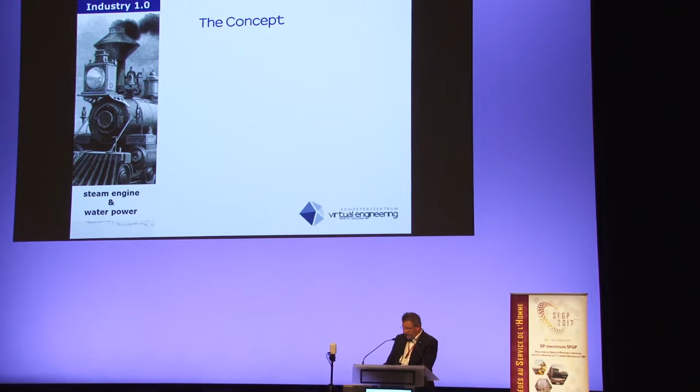So, history continues, a little history. Why do we call it Industry 4.0? Of course, the first industrial revolution came with the steam engine and water power. With this new technology, we increased mobility of people and of goods, and it led to the speed of production itself.

The second industrial revolution was by reorganizing the work. The production was done now on assembly lines, and the introduction of electricity was supporting this fact and also brought wealth to the people. So the second big change in production in the life of people.

The third level of industry was only limited now by the physical boundary conditions of the equipment. We developed software, we developed embedded systems, and they were helping to create or to use smart products, smart devices, but the limit was that they were not connected yet among each other.

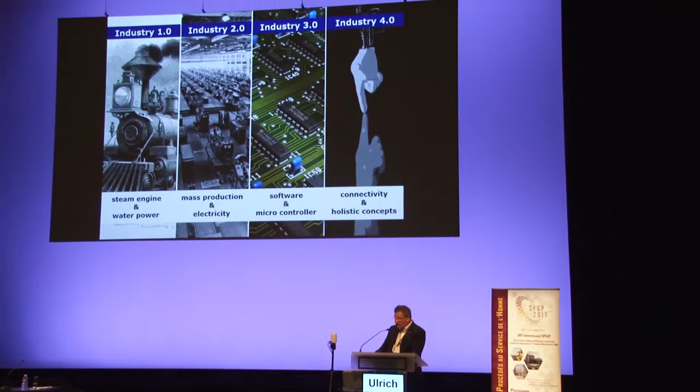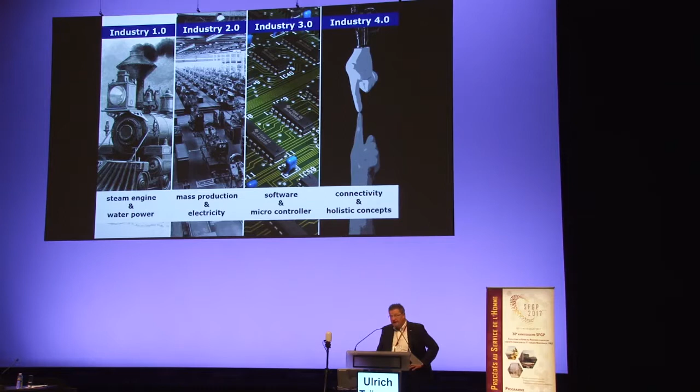And this now leads to the fourth concept, the Industry 4.0. Here, all smart devices - I'm using some examples later on - regardless of the data exchange protocol, one follows now not an individual device, but really tries to connect everything with each other. So the idea behind Industry 4.0, at least this is my perception, means no boundaries between the machines and the software, no breaks. That means there is really communication possible among all the devices.

Also important, and this changed the view for process control people, there is not really a hierarchy anymore in the organization of devices. You can simply say everything is totally connected. And in the words of our Chancellor Merkel, this is what we call Industry 4.0.

I have to say at this point that the term Industry 4.0 was never a research project, was never an official project of the federal government. It was a concept paper written by the federal government and later established in the group called the Group of Industry 4.0. But this group, of course, consists logically of software producers, and this is why the interpretation of this terminology has to be seen under this aspect.

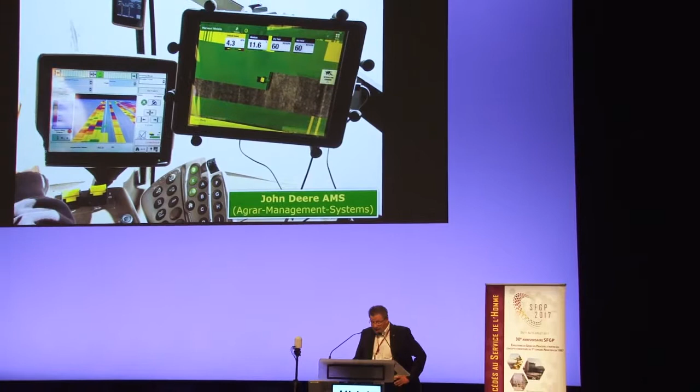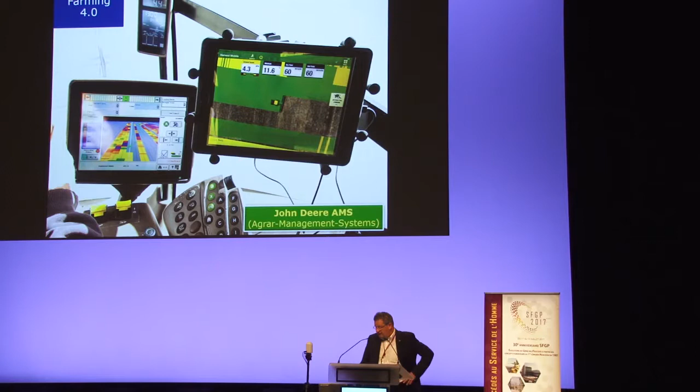And this I want to show with my next slides. I call this Farming 4.0. What's seen here on the picture? The farmer, of course, it's a John Deere, this is my sponsor, shows you a picture of the interior of a cabin of a farmer. And the modern farmer uses data on the condition of crop, of the soil, be this humidity, be this the growth state, be this any attacks by weed or any attacks by bugs that are not wanted. At the same time, the modern farmer is connected to databases where he or she gets instructions of what to do with the field that has to be treated.

And on the left picture, you really see that these are compartments, something a human being cannot really tackle with. So you need modern software, you need the connection to databases, you might also need the connection to the chemical products that are used to accelerate growth or to do the bug control or the weed control. And so the farmer is very, very modern already. And my colleagues from John Deere always said, we do Farming 4.0 already, but we don't do Industry 4.0 yet.

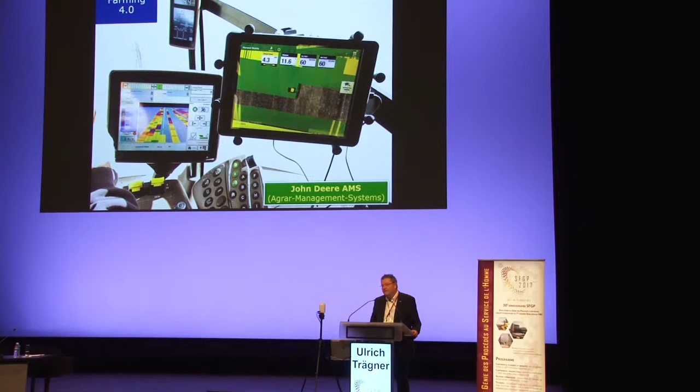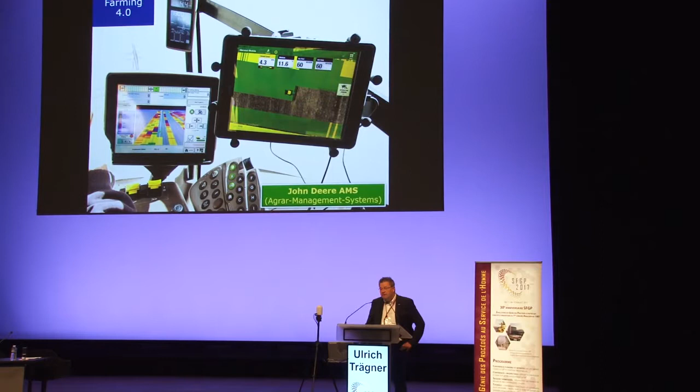This is a surprise to me, but maybe I can show this later again. What I also like on this picture is this device. Most of you might recognize it. It's an iPad. And this is also typical for Industry 4.0. Industry 4.0 connects everything with everything. So if you want innovation to seep into everyday life, you do this by using devices that are familiar to everybody. This iPad is nothing new for the farmer. He is using it for private reasons as well as commercial reasons.

And this is, I will say, also really characteristic when you say you connect everything with everything. So a product is not leaving the factory without being connected to its customer. This is very important.

Now, John Deere says, oh, we are not doing Industry 4.0 yet, but in my understanding, yes, they do this in cooperation with our university. We run a 5-sided cave, and a 5-sided cave you have to imagine as being a cube of 3 times 3 times 3 meters, and people go in there and they are inside an image, and this image is 3-dimensional, and this 3-dimensional picture allows you to do certain jobs.

In the past, John Deere was, when they developed their product, mostly concentrated or focused on the cabin, where the farmer is doing his operation and the control of the engine. In the past, John Deere was building 6 prototypes. The 6 prototypes were awfully expensive.

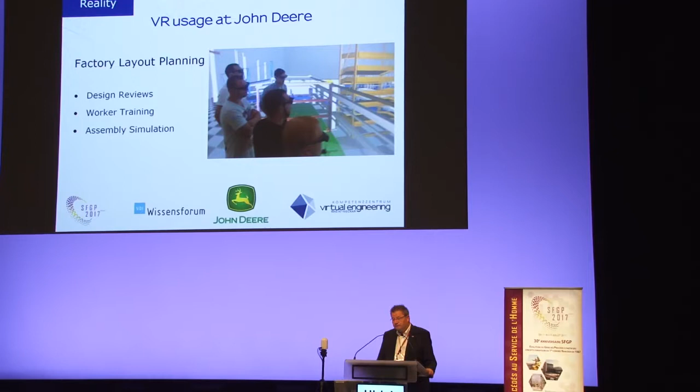Even there, and this is maybe because they say they are not that far yet, the factory planning is not really an integral part of the digital system yet at John Deere, but we have already started doing so. So product, customers, and production is what is connected with the idea of Industry 4.0.

Well, then, after learning, being a chemical engineer and of course also the director of this corporation, I was asking myself, how could this be that the car industry, the commercial vehicles, are further advanced than we chemical engineers, than we process engineers? But then I remember that I was invited for several years now to the Digital Plant Congress in Würzburg, and they had actually the same idea.

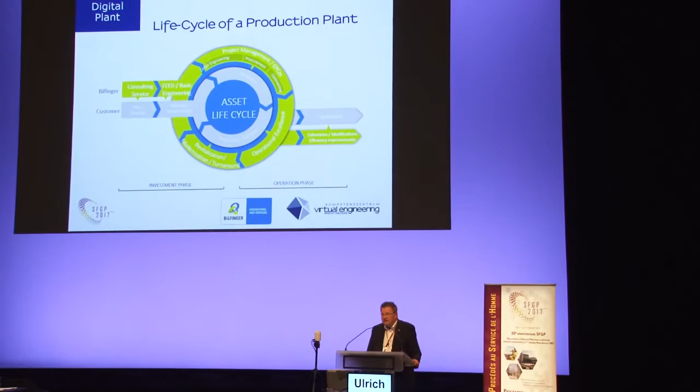To introduce connectivity, to introduce the holistic view into process engineering. Here I learned, and I also found partners in Bilfinger, that being a chemical engineer, a process engineer, I should not look on individual things exclusively. I need to connect exactly with John Deere as well.

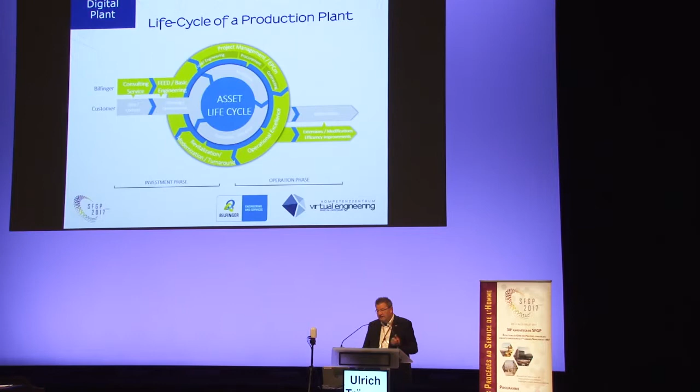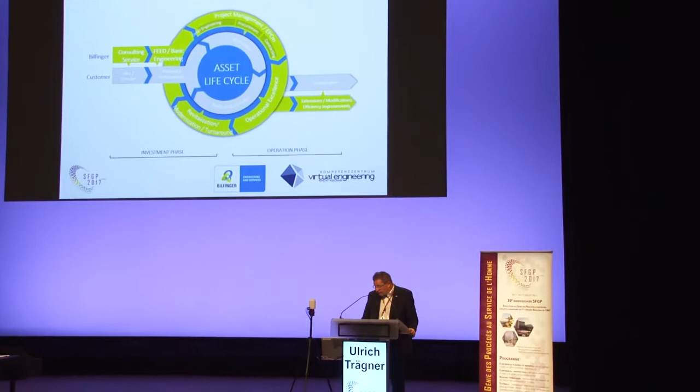So there is a creation phase for your products. There is a creative phase for the design of a plant. There is a pre-design phase for your plant. There is a pre-design thinking, a pre-design, a preview of your product, of your planning.

And then don't forget, when we build products, and the products can be, in our case, either a chemical plant or it can also be the chemical product, our products live much longer than a tractor. A production plant is living sometimes up to 40, 50 years. In BASF we had, I think, factories that run 100 years now and are still in operation.

During this life cycle, you need to redo, you need to review things, you need to do smart maintenance and revamping. These are all keywords you learn when you deal, or when you try to consider, the chemical production in terms of process life cycle or product life cycle.

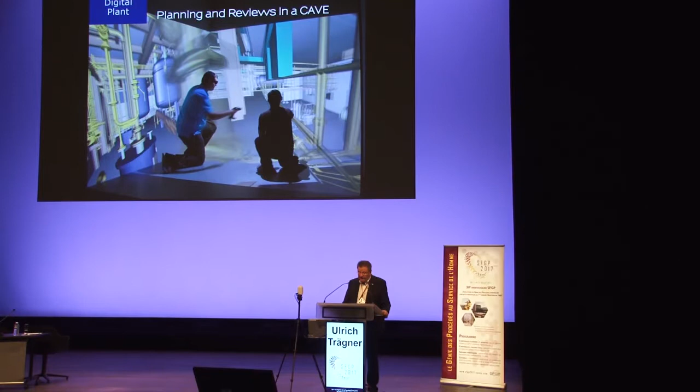So with time, we have more and more demand also from the chemical industry to use our cave, which is nothing else than the visualization of digital data. We use the cave with our customers, or with people who do planning, for plan reviews.

I learned that the review process in this business is not that simple and not that trivial, and it's not that homogeneous as with cars or commercial vehicles. We do layout planning, exactly like John Deere does with their plant. We do safety reviews. Actually, one can do with digital models, if available, the whole HSE, meaning Health, Safety and Environment Management Program.

And you can do this at an extremely early stage, meaning when you do the planning with the proper digital system and with the help of visualization, you can tackle and speed up your planning, and you can tackle complexity which you could not handle before. But you need a digital model, at least a digital volume model.

Think also of the situation where you design a GMP plant, good manufacturing practice, where you are not allowed to enter because you would spoil production. You could do reviews in a virtual space, and this is a possibility you did not have before.

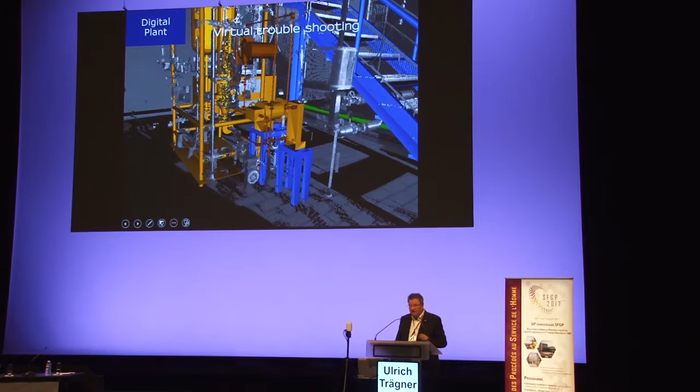This was the planning stage before we got this plant built, this distillation column built. Actually, this distillation column and the location of this pump was done exactly according to the plan. And this down here is the image of a three-dimensional laser scan. And then you see the location is up here for the planning stage, and this pump in reality is sitting down here.

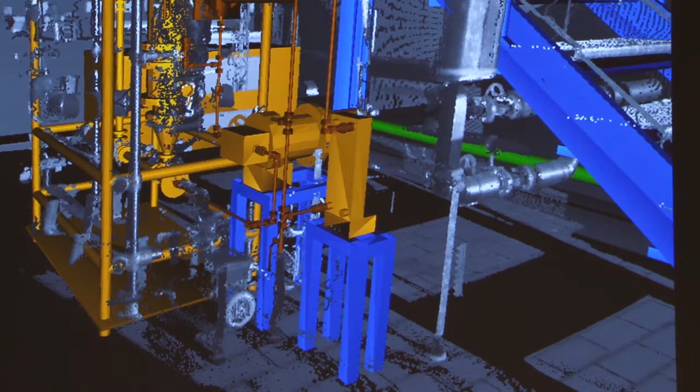Interesting, if we would have had this three-dimensional tool when we designed the column, the distillation column, that was 12 years ago or even longer, we might have discovered that you cannot locate sump pumps that have boiling liquids coming into a pump.

You cannot locate this directly on the same level as your reboiler. And I'm teaching this to my students, that you need to have a certain net pressure before the pump so that you don't have cavitation in the pump. And we had to learn it in operation after the third pump was gone and destroyed.

We said, okay, this is a mistake in the design. We have to put the pump down at least to have a certain amount of pressure on the suction side in order not to run into the danger of cavitation.

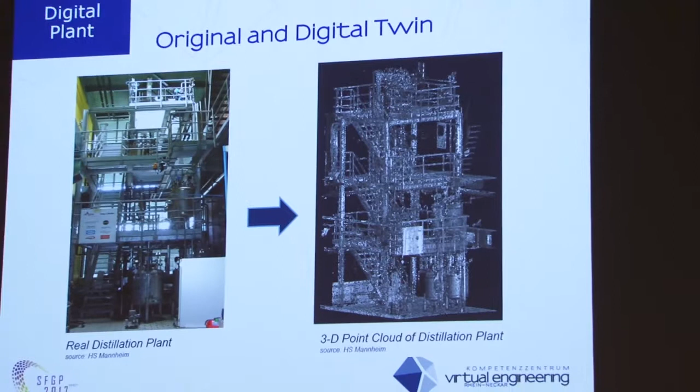Some people think, okay, if you take a three-dimensional picture of a real plant, you already digitalized your plant. This is a digital twin. Actually, this is just a small piece of a digital twin. The digital twin is much more.

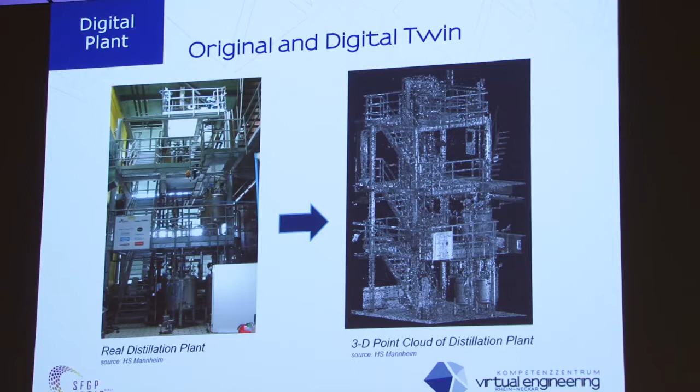It is the program itself, it is the model itself, it is the PLT, the digital computation system, it is also the 3D laser scan, which can be used to control and do a documentation of reviews and revamps. So this is a useful tool to do so, but later on, when you would have a whole digital plant, you could do virtual startup, virtual training, safety training, and virtual field trips, as I mentioned, with GMP production.

Well, we had the changing things, the digitalization in the process industries, and I'm educating young engineers. What do I have to teach them in order they are fit for future plants, as you say, the production site of the future? So I call this EDU 4.0, and because it's one of my courses, I can talk about it in more detail.

My course is called Plant Design or Plant Planning, and of course the specialist will immediately recognize everything. You need the process development step, you need the detail engineering, you need the basic engineering, you need project management, and these are already parts of the education system or already part of the course.

But then there is this cave, then there is smart manufacturing, then there is virtual reality, then there is human-machine interface, then there is a product and process life cycle management, then there are communication platforms, and then there is also sweeping around in our days the term big data. And all these things have to do, or will have to do, with plant design and with process design, but how to integrate this?

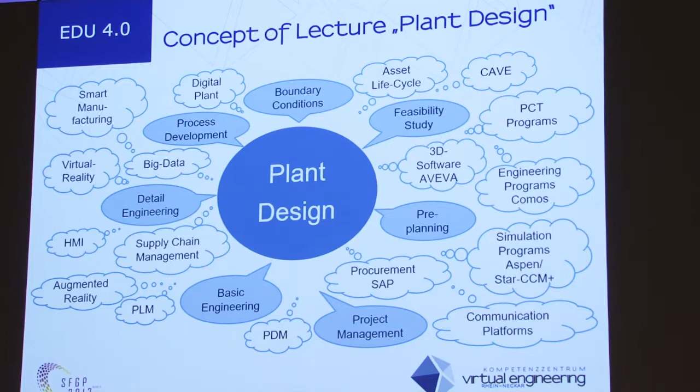This picture I will not have too long sitting up there because it contains no pictures, so it's not that sexy. So the professor, which is what I have to do, still has to teach the basics.

This will still be 80% of our doing, but we also have to introduce the digital tools that are used in industry.

We, for instance, use Pro2 for the thermodynamic modeling. We use COMOS to do the engineering programs. Lately, we established a course where we use the Aveva E3D, which is a 3D software package, in our master course.

But this is not the center. This is just tools. And this is what I want to say with this slide. The professor still has to be able to combine and connect the basics, but also to introduce new and modern tools.

And the tools themselves are developing. They are more and more integrating into each other, so you can exchange data between two-dimensional planning and 3-dimensional planning. If you have the 3-dimensional planning, you can do the reviews in caves, as we do, and the communication with Moodle platform, OneNote and cloud computing has to be established at the university. So this was the non-picture part.

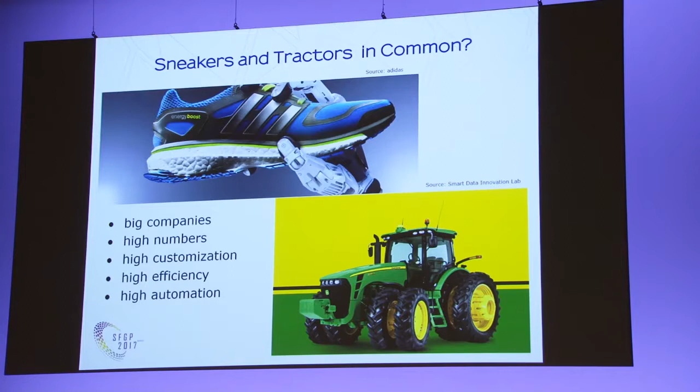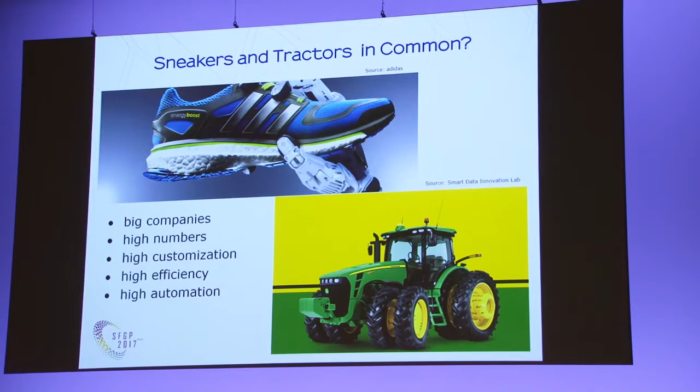Now I'm coming back to the wrap-up. What does a tractor and a sneaker, here it's the Adidas new shoe, have to do with each other? A lot. If I were talking in front of PLM, PDM specialists, I only would say one thing: both are using Pro Engineer, Creo, which is the product of PTC. And then I would not have to continue talking.

But what does this mean? When you try to establish Industry 4.0, you want to use this technology to tackle jobs that have to do with a wide variety of customer needs and requests, and you have to do this in a high number, not just 2 or 10 shoes. No, you have to do this with millions of shoes a year or a day. I don't know how many they are selling.

And the tractor down here, you also see that this is a customized thing. It can be not a 4-wheeler, it could be an 8-wheeler if needed. And the production needs to do this without stopping; it has to be online, assembled. So you need smart design tools connected with excellent PLM systems that can do these things automatically.

And this is why I chose this picture. Both are using the same software backbone, John Deere and Adidas. Adidas is in the planning stage to tackle this problem.

So let me conclude. From my point of view, what comes with Industry 4.0, you can discuss in terms of whatever is a need of your company, and I think it's a logical step in the development. You will not be able to stop the digitalization of production and the interlinking and networking.

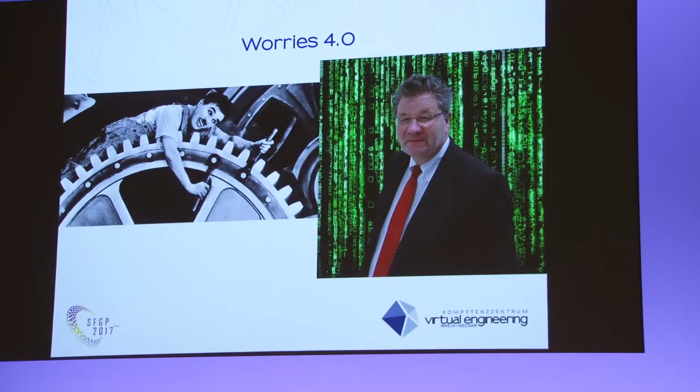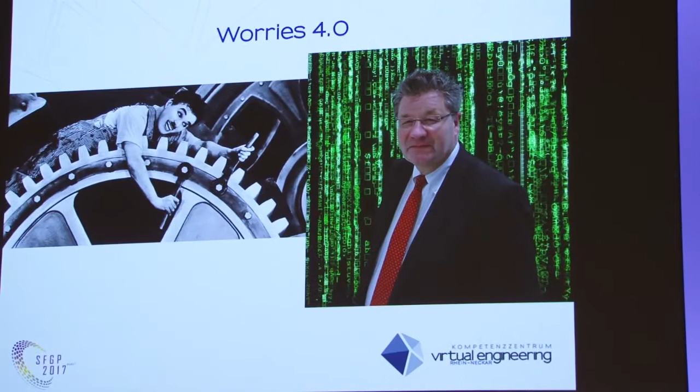Of course, every change is connected with worries, and the left picture shows that it went well because Charlie Chaplin survived this film. The right picture, this is me, and still it's me in the foreground of the picture, but in the background of my personality, Google and Amazon and co are collecting my data and analyzing this.

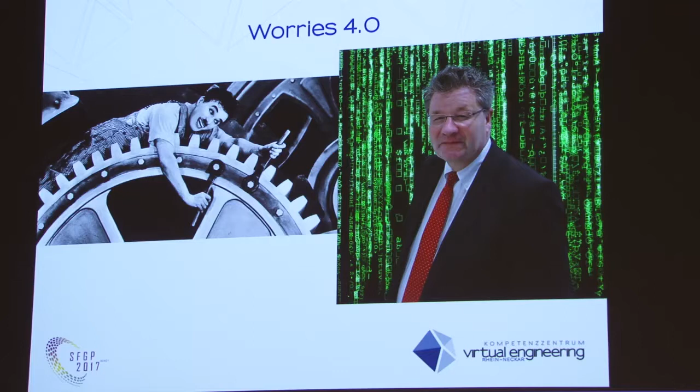And even my government is trying to jump into my data and use this for some reasons. And what's interesting, everybody who runs a Google phone, an Android phone, they already know not only what you want and what you like, they also know what you will do next. And this is finishing - thank you very much for your attention.

Yes, thank you very much for this very nice and clear presentation. Behind the concept of Industry 4.0, looking at the education implications that they have, is there some standard for industry, standard for connecting, and also, by the way, I've heard that in Germany they have some special education training for Education 4.0 dealing with such a standard.

Well, there were good questions, and there are answers that are difficult to give. First of all, Industry 4.0 is no standard. Industry 4.0 is a concept for everybody. So this is the car industry and the commercial vehicle industry, and in my understanding, they are much further in integrating this concept of I4.0.

They did it before, but for our jobs, plant design, plant planning, I know from BASF how difficult this is to introduce. Even the software products offered in the field of chemical production, chemical engineering planning, are not that far developed. There are two tools I know of that might be successful if they're able to adapt to the needs of the customers. They are not coming from the chemical branch.